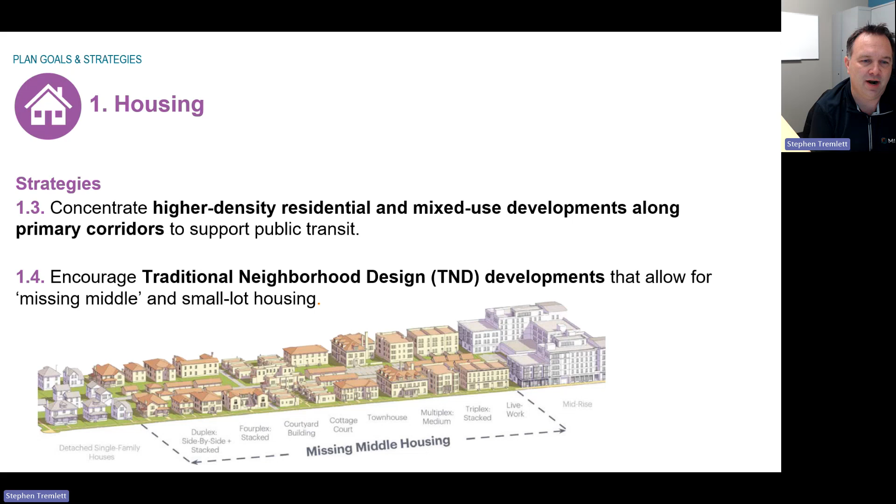1.4, encourage traditional neighborhood design developments that allow for missing middle and small lot housing. This is a graphic that's been shared throughout planning with the idea that older neighborhoods in the past did have this variability of missing middle that doesn't exist now, and there's interest to see that variety of housing types and options moving forward.

Mobility goal is to implement safe, convenient, and attractive streets that are accessible for all ages, abilities, and modes of transportation. The strategy for that goal is to develop a convenient and connected multimodal transportation system that links the neighborhood to the city and to the county at large.

And 2, require proposed streets to connect to existing streets and intersections where practical. That graphic we're seeing on this page demonstrates that. That white line divides 2 developments with the connection of streets and connecting out to the main arterial.

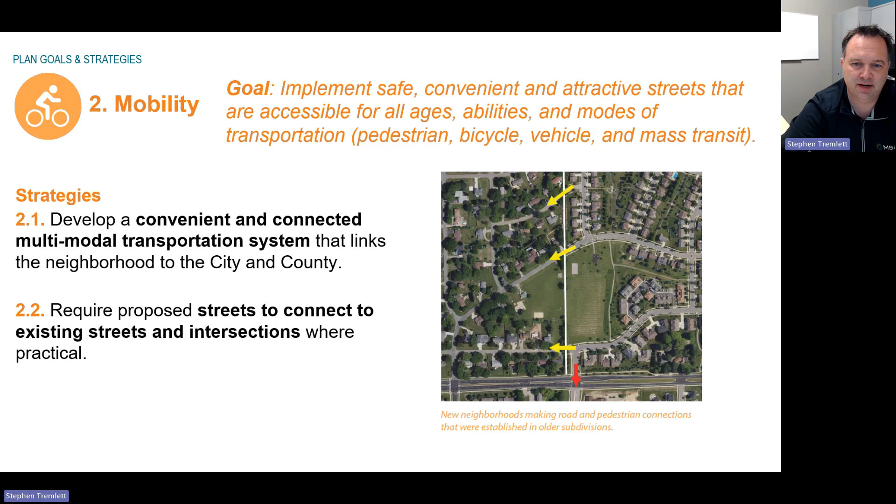Third strategy under mobility is to discourage cul-de-sacs and dead-end streets in favor of connected streets that provide flexibility. And fourth, design complete streets and utilize traffic calming and safety measures where appropriate to create a better street environment for pedestrians and cyclists.

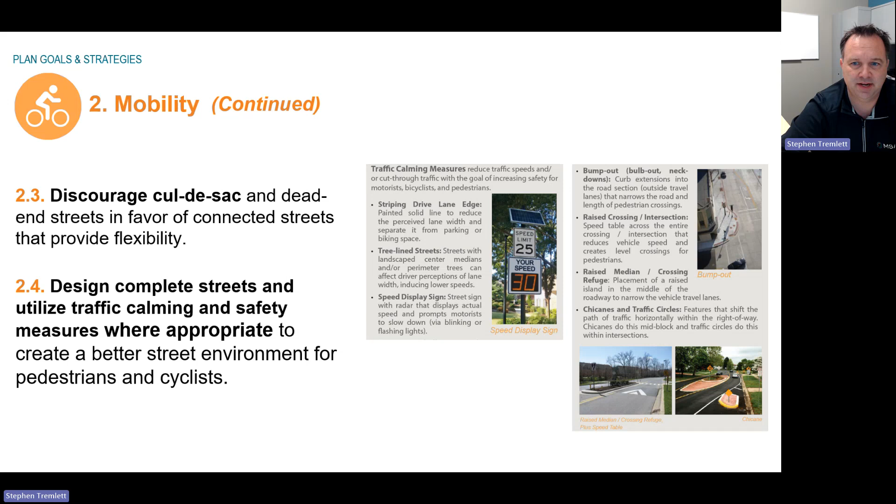Economy goal: locate employment options near residential areas, supporting the local and regional economy and providing job opportunities. First strategy under this goal is to attract businesses that meet local and regional needs, provide job opportunities, mix of uses, and expand property tax base.

Strategy 3.2: promote commercial and business park areas compatible with the scale of surrounding developments or screened to the extent practical. And strategy 3: incorporate safe and convenient pedestrian, bicycle, and motor vehicle connections within and through commercial mixed use and business park developments. The example here is actually in Fitchburg, where there is a combination of a business park to the south with a residential neighborhood to the north.

The orange arrow shows the road connection that is not directly to the arterial through the business park, but is providing access from the neighborhood into the business park without having to go out to the main road and back through. The yellow arrow shows there is a pedestrian connection straight through from the neighborhood to the business park.

Also notable is that in the business park the building types are smaller, closer to the neighborhood, while there are larger buildings, such as in the southeast corner here, showing a much larger building further away that's further buffered from the neighborhood.

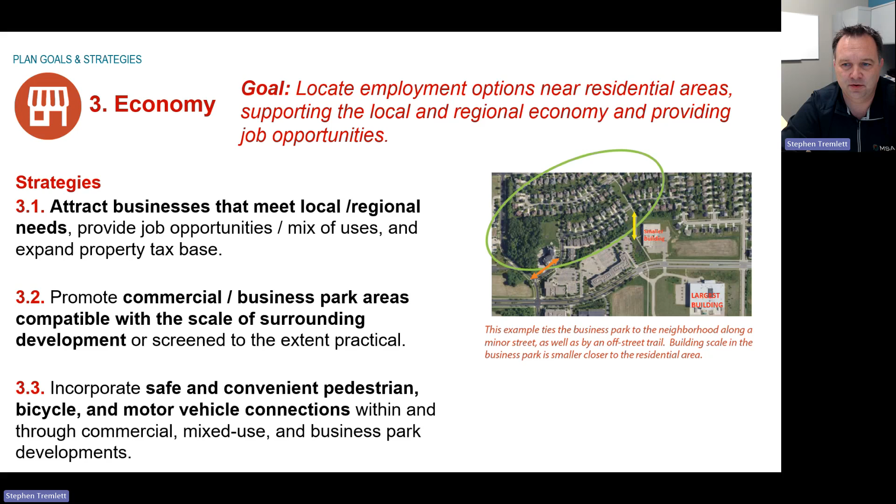Quality of life goal is to maintain streetscapes and open spaces that are accessible to all residents for recreation and enhance neighborhood character. Strategies under this goal include designing residential areas around community gathering spaces, parks, schools, churches, and community gardens.

Strategy 4.2: plan parks that vary in size and facilities to fulfill ranging recreational interests, consistent with the Fitchburg Parks and Open Space Plan. And 4.3: make intentional multimodal connections between local and regional parks and open spaces.

Example here of a neighborhood in Sun Prairie where there is a blend of different park spaces. The green circle shows your traditional park, yellow shows more of an urbanized boulevard, and the red is a town center around mixed use.

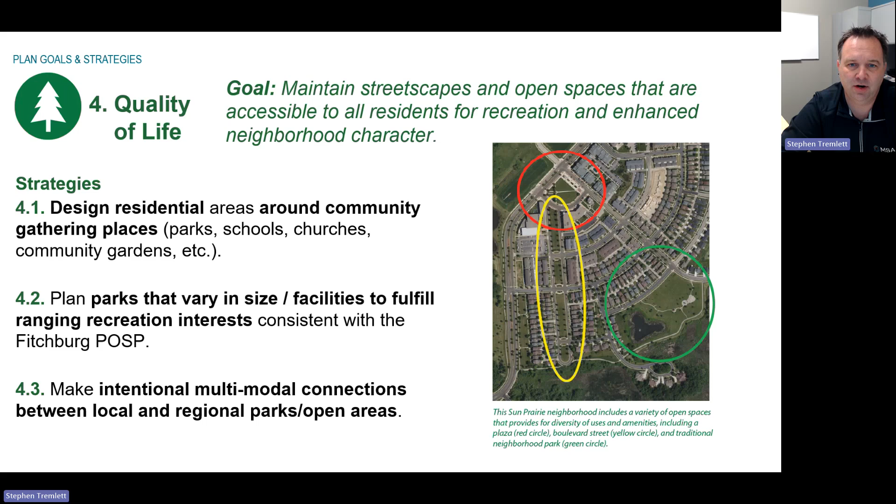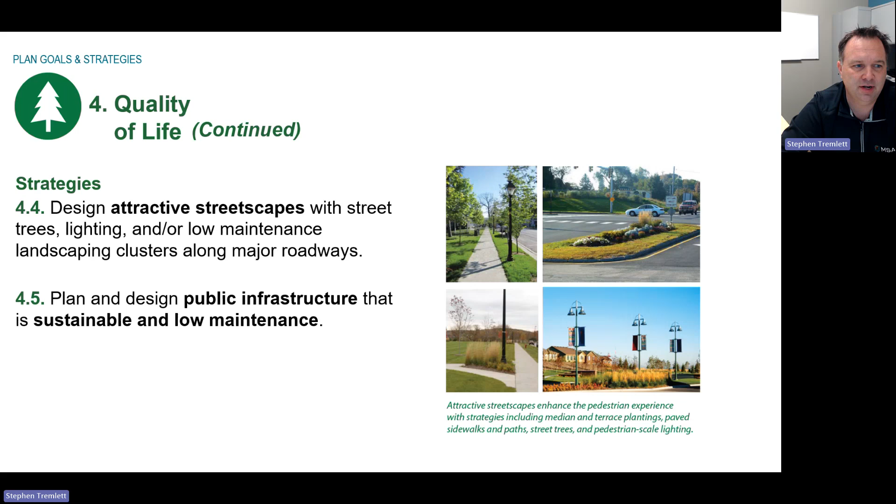Strategy 4 under quality of life: design attractive streetscapes with street trees, lighting, and/or low maintenance landscaping clusters along the major roadways. And strategy 5: plan and design public infrastructure that is sustainable and low maintenance.

The fifth goal, sustainability: create an economically and environmentally sustainable development pattern, protecting existing natural features. Strategy 1: protect and restore the environment by integrating natural features into open spaces for recreation, public gathering, or flood protection and stormwater management. Strategy 5.2: preserve existing tree canopy to include woodlands that will not be quarried.

Notable: this neighborhood is primarily currently being quarried on the northern portion, so there are some wooded portions that may not remain after that operation is done. But if there are portions still existing after the quarry operation, the intent is to preserve those woodlands.

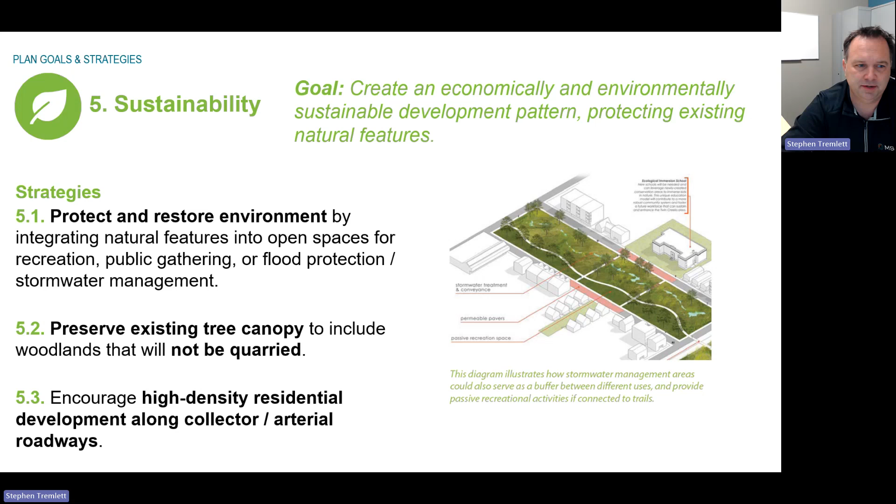Strategy 5.3: encourage higher density residential developments along collector and arterial roadways. Strategy 4: explore options to recycle quarry byproducts through site development. Strategy 5.5: encourage energy efficient buildings consistent with the city's energy targets. Strategy 5.6: consider opportunities for alternative energy use within the neighborhood design.

Now I'll go through the progression of the land use concept that is the baseline meeting those strategies and overall goals. First, I want to note what this concept plan is and what it's not.

What it is: a long-term vision and what's allowable if applying for development approvals. It supports identifying character and design parameters and identifying infrastructure needs to best serve that neighborhood and adjacent lands in a fiscally responsible way. But it's not suggesting property owners shall redevelop or sell for development.

It's not restricting landowners from using their property as they're currently using it. It does not determine exact placement of roadways beyond connecting point A to point B of collector roads, meaning on the edge of the land being developed, they need to connect where we're presenting a major east-west or north-south connection. How that might meander within the development may differ in the ultimate plan.

And lastly, it's not determining lots or specific building type placement.

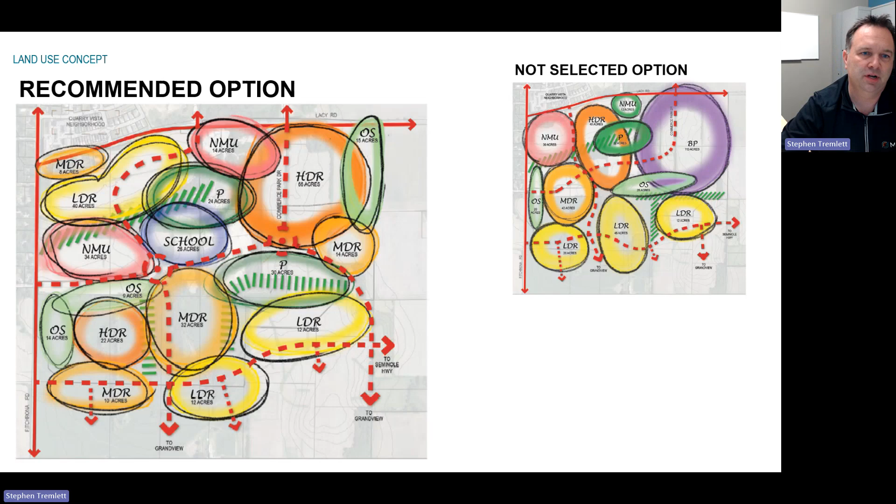So some changes from the bubble diagrams to the initial detailed concept here. Just go through each one. First, the bubble diagrams describe what the uses are intended in the northwest corner of this quarter area, but that is outside the study area. So moving forward, you see that plan, a low density residential neighborhood outside the study area that's already in the urban service area, with intentions for that neighborhood to the north as the road network shows.

But changes from the bubble diagram include: one, identification of several collector roads connecting the endpoints, with suggestions that two roads run north-south through the western half of this neighborhood, connecting south and up to the neighborhood to the north. Two, connection of collector A with the opportunity for that to connect out to Seminole to the east.

Number three, the inclusion of business parks — that's the purple you see here. The school is still in existence in this diagram, but the neighborhood mixed use moves to the east side of Commerce Park, with business park making up the western portion of Commerce Park Drive. It's hatched, meaning it's an option, flexible land use. Potentially that use between business park and the high density residential shown here is largely impacted by whether there is a remaining high wall between the two quarry owners.

As quarry operations are ending, reclamation plans are put forward where you bring back the land to agricultural use, and you have to tie in at the property line to whatever elevation exists today. So if both quarries end up reclaiming the land, they would have to come to a point at that line — so there's kind of a high wall that would show up right here between them. That does not provide for likely use of business park along Commerce Park Drive. That's why you see that blend of use between Commerce Park and the purple business park. If those lands were worked out to be flattened between the two landowners, there's a greater opportunity for business park there.

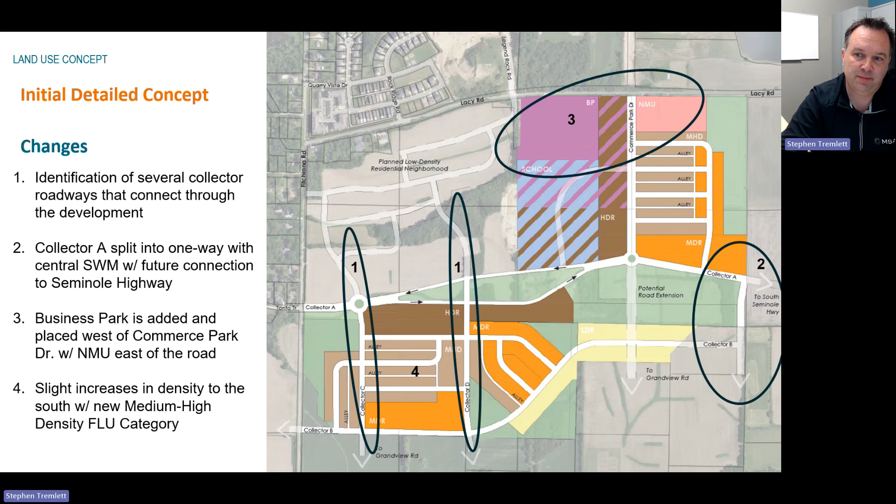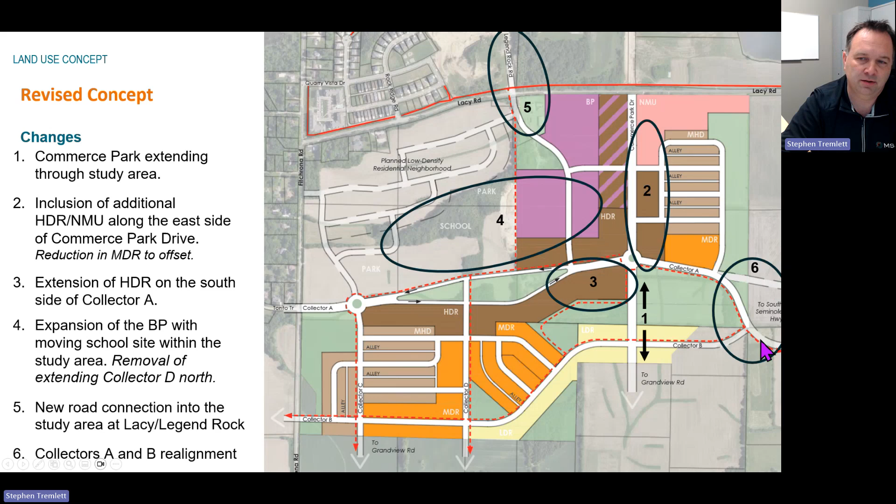Number 6 is a revision of how Collector A could potentially develop over time. Currently, the original design had it going through what is now a solar farm, which is now an end use for those lands to the east. So there's plausibility that the road to Seminole Highway could still be where number 6 is labeled, but alternatively there's an option to take Collector A further south and around that solar farm to reach Seminole Highway.

Even further, a final concept was drafted. This was after we had preliminary engineering. So everything up to this point has been evaluating land use primarily, but at this final stage we've done preliminary engineering to understand utility needs and stormwater management needs, and through that we've determined that the land dedicated for stormwater could be reduced.

So you see number 1 in the northeast, an expansion of the neighborhood mixed use all the way to the edge of the neighborhood. Number 2, inclusion of an NMU, neighborhood mixed use, in the southwest portion as you come in from Fitchrona Road. Number 3, there was discussion that those lands are wooded and would not likely be quarried, so preservation of that area was one of the strategies we talked about earlier. Number 4, showing this trail network that could go through here, which didn't exist in the previous concept.

Number 5 is incorporating a trail, the red dashed lines, all the way from Lacy through this neighborhood and hopefully all the way to Grandview. Number 6, in some of this additional trail network, it was felt that it was not necessary to include it on the section between Collector A to Collector D along Collector B. So that portion has been removed, with the replacement of the areas shown in 4 and noted in 5.

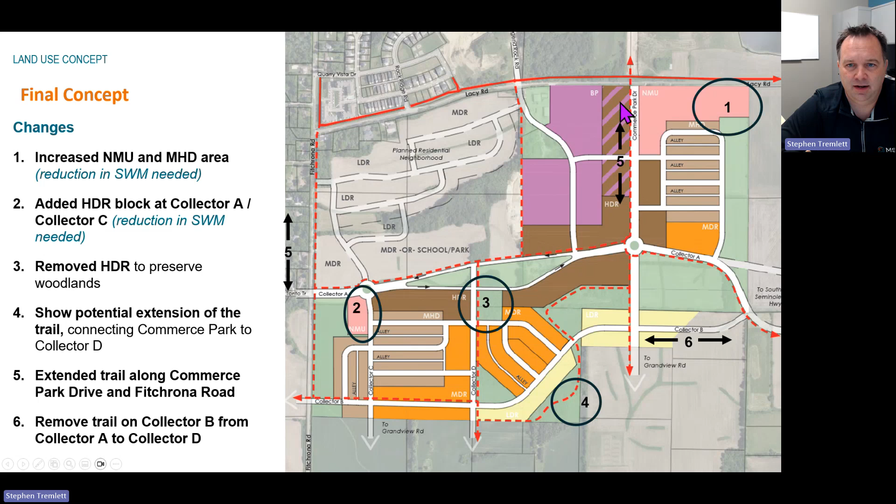I want to touch on the idea that this area for the school is outside of the neighborhood, but through discussions with the steering committee, it was important throughout this process to consider a school in these lands. We did discuss with the district about their interest here. They are looking for the parameters listed on this slide for an ideal location, and there's interest potentially from the school to locate here given the amount of units we're talking about in a walkable neighborhood. If it were worked out with the landowner, it could likely be in the portion that's circled, with a park in addition, potentially, which could reduce the school's land needs if there's a shareable park.

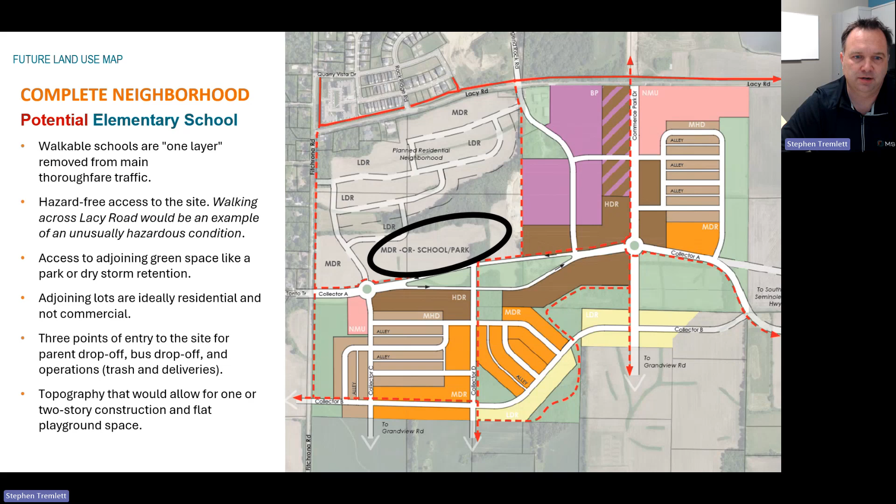So what I described earlier was the concept. Again, that gets into parameters of design, kind of blending mixes of uses desired, but ultimately the policy document is the future land use map. When the city created their comp plan, they identified this area as a growth area and suggested there would be some additional planning, which is this process, to determine what those future land use categories should be for these lands.

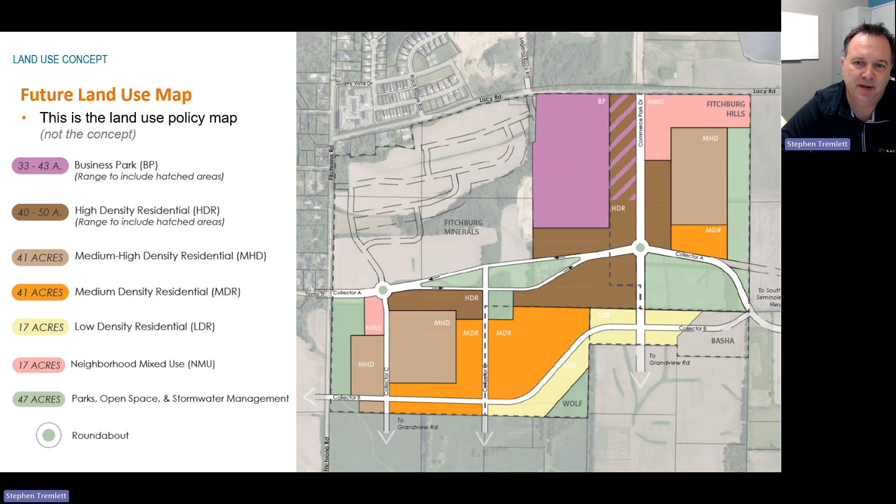So that is why we're going through this process, identifying the future land use for future proposals from landowners and developers. So that concept I showed, this is more of a version that is the policy document. You don't see all the road networks that were presented in that concept. You see the major collector roads, but it's not presenting exactly how any interior local roads are being designed. So you see those categories, and there would likely be parks, and additional parks within these areas, dependent on requirements per code.

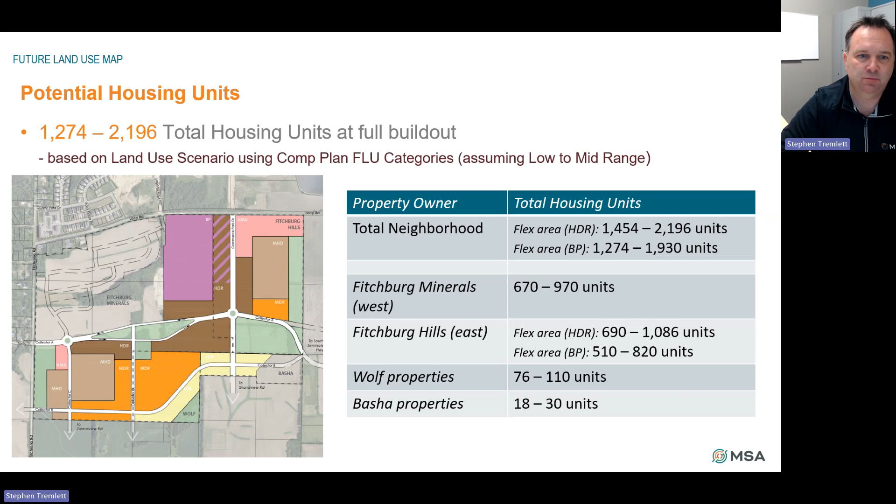So in total, we're talking potentially between around 1,300 more units, up to 2,200 more units, depending on how densely the area grows. Notably, we divided this out a bit by landowners, because obviously these are going to be built individually by landowners unless additional lands are purchased. But just wanted to note that we're talking about potentially up to 5,000 more people could be in this area, depending on household size.

So I'm going to go a little bit about the preliminary engineering. We looked at traffic here, and this is evaluating per full build out by 2045. We base it on certain home types and commercial types, so we did have to make some decisions here to get a projection of the number of trips that would be in and out of this neighborhood.

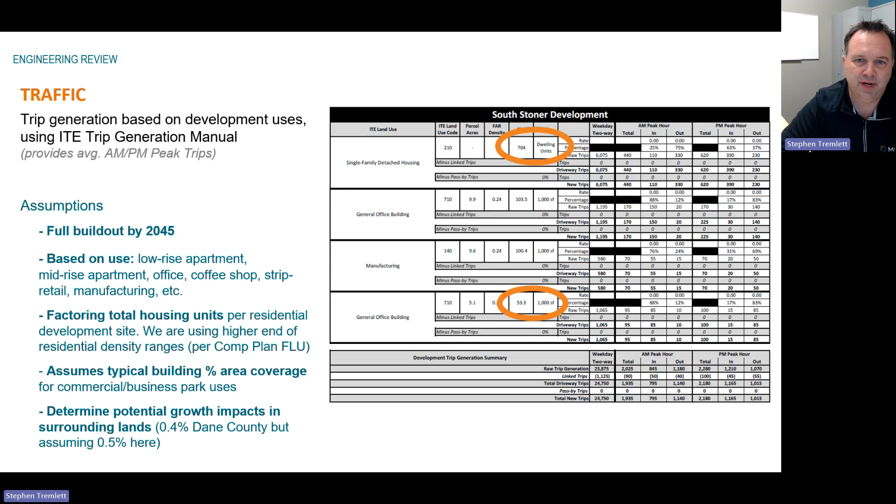It assumes a factor based on the median. Every future land use category has a range of density, so like low density is 2 to 5 units per acre. We took the median of that and used that to determine the number of housing units. We also included additional growth potential of 0.5 for areas developing outside this area—typically in Dane County you'd use 0.4, so we were more conservative. We also included a 20% increase on total trips. So basically, we took a median but added a lot of contingencies and conservatism to that number to equate to a certain number of trips through the neighborhood.

What does this tell us? We're showing two options here because we had that flexible area—the number 6 on the graphic could go to high density residential or could be a business park. Option A is all residential, Option B includes a business park there. In total, we're looking at AM total trips between 1935 to 2005, and in the evening, 2180 to 2255.

We have a breakout of assumptions for where traffic would flow through the neighborhood and out: 10% to the west, 15% to the north, 30% to the east on Lacy, and 15% east on Collector A.

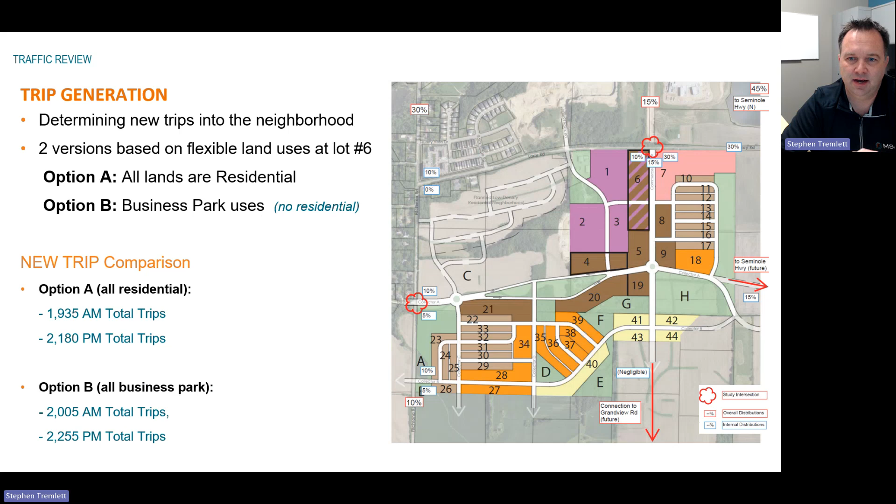With that trip information, we're also able to look at specific intersections to see if there's a warrant for controls—meaning is there a signal, is there a roundabout, or is it free flow. The evaluation of Commerce Park and Lacy, in the box you see in the north, suggests that at full build out, there would be a need for a controlled intersection.

Staff has interest in seeing that be a roundabout. There's a roundabout going in at Fitchburg and Lacy to the west, and there's already roundabouts to the east towards Seminole Highway. Generally, controls work best as roundabout after roundabout after roundabout, because that helps with efficient flow.

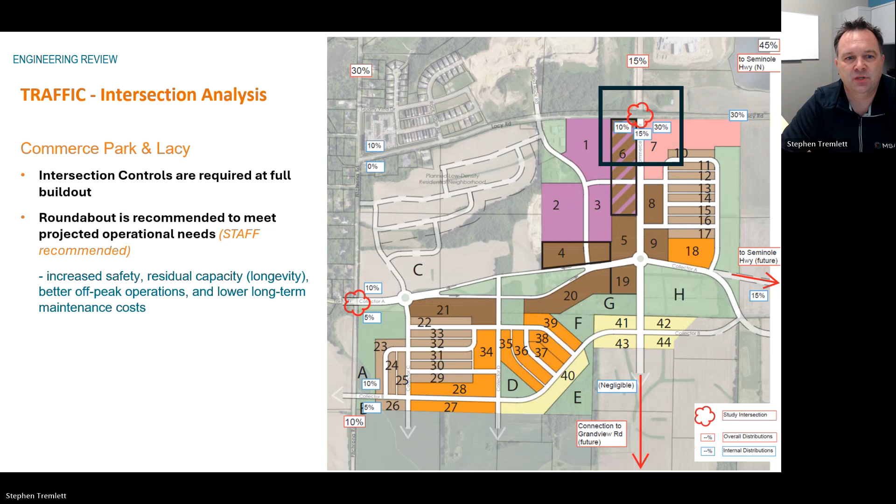Then we also looked at Collector A and Fitchrona to the west. Based on full build out, it's not recommended for any controlled intersection—you would likely have a stop sign on Collector A before getting onto Fitchrona. There will be some longer queues potentially for left turns onto Fitchrona. Ideally you're at level of service D or better; it does project that at full build out it may be an F. However, going to a controlled intersection can create more accidents from people being impatient trying to get into traffic on Fitchrona.

So it's not suggested that any additional controlled intersection is necessary here, but as it develops it can be reevaluated. I did want to note that we intended for Collector B to the south to have the opportunity to continue west past Fitchrona. There is a potential proposed development in the Town of Verona on the west side of that road, so further modifications may take place considering where that Collector B actually lines up with Fitchrona if that development goes forward.

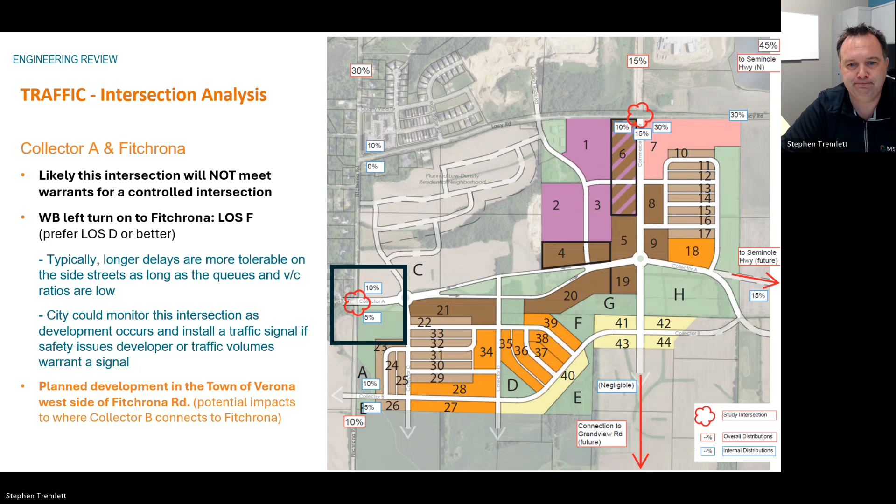Talking about utilities, starting with stormwater management—I noted earlier that the sizing of the basins were reduced. This is what you see where there's a dividing line between a western development, circled here, and the eastern development. So there's a split line again where that one wall would potentially be between the two landowners, and it all would drain east of that line. You see two wet basins and a dry infiltration basin in the center that will serve that area.

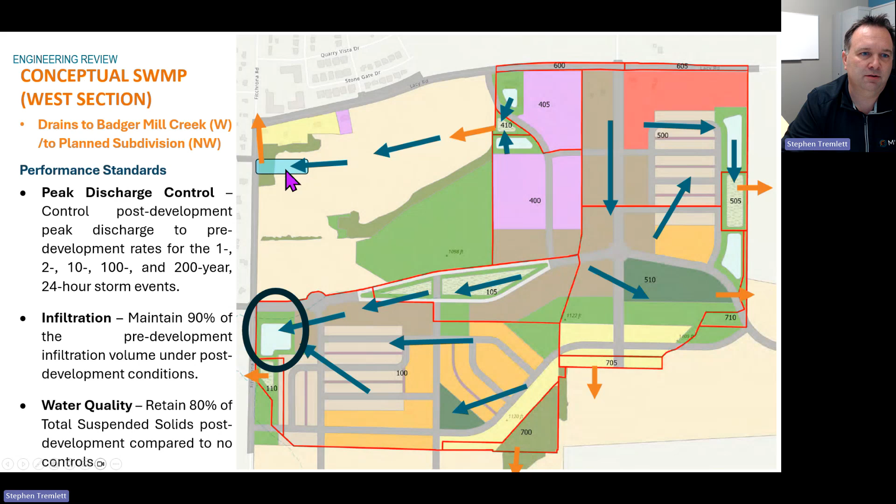The western half, we are presenting that there would be a split roadway with dry basin infiltration in the center of it, similar to Sherrill Parkway—a similar design in Fitchburg. All water here in the lower portion within the neighborhood would funnel to the west along the edge there. We are presenting how the water would flow to the north, outside the neighborhood. There is a small portion in the business park that would funnel through that system and run out to Fitchrona and head north.

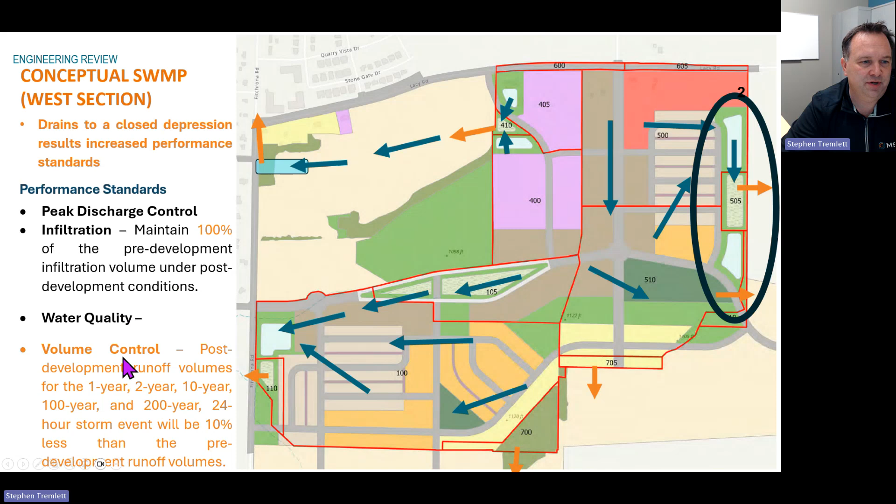Did want to make another note that on the eastern portion, circled here, that drains to a closed depression. That closed depression requires increased standards, noted here in orange, taking up to 100% pre-development infiltration volume, and notable increases in volume control necessary in that sizing.

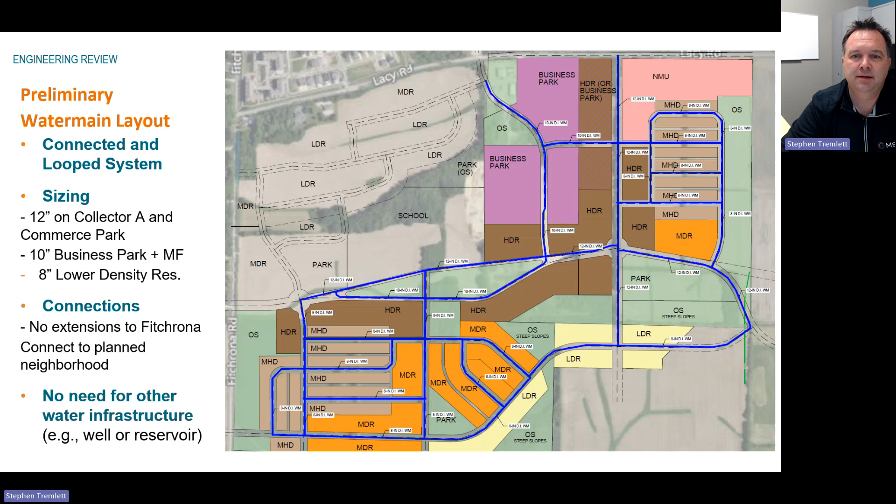Water main, you'll see generally everything is looped, meaning you want developments to have multiple connections in case one breaks or needs to be shut down, to still serve the neighborhood. So that is intended here. Again, a lot of the street network here is conceptual. The local road design will be by each development. This is just giving a representation that it can be served in this area without additional water infrastructure beyond the piping that is sized based on the development along it.

Sanitary design, notably, practice has been to use 100 gallons per day per person for evaluating capacity. The fixtures people put in today are a lot better, low flow, and we can comfortably drop that to 80 gallons per day. There's actually been a study in Wisconsin that showed 53 is the average. So we're still being conservative at 80. I'm just making that note because that still impacts what capacity is for serving into this neighborhood.

We did look at options for how to serve all of the neighborhood, wanting to not exceed 30 feet in depth for that utility, because as you go down, it gets more expensive. This is split, just like stormwater, eastern half and western half. The blue outline shows how the eastern will be served from Lacy Road. The connection shown in that green line is what we're looking at for sanitary design.

But notably, there's potentially capacity issues to what we project for how to serve at full build out for this, because the city does want to reserve some of that Lacy Road connection for additional development along Lacy. So there would need to be considerations of either density staying a little bit lower than we are projecting, or there needs to be another connection point. Maybe it's collector A here that connects out to Fitchrona. Maybe there's another service that comes and works out with Edgewood College.

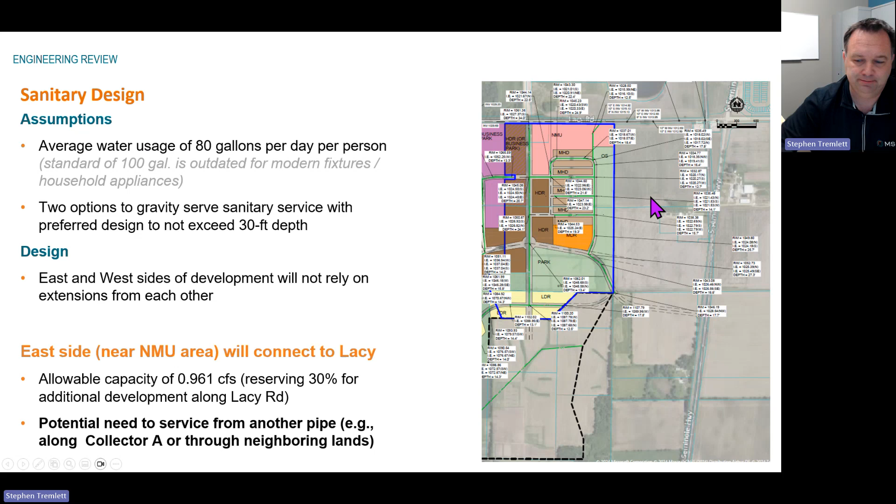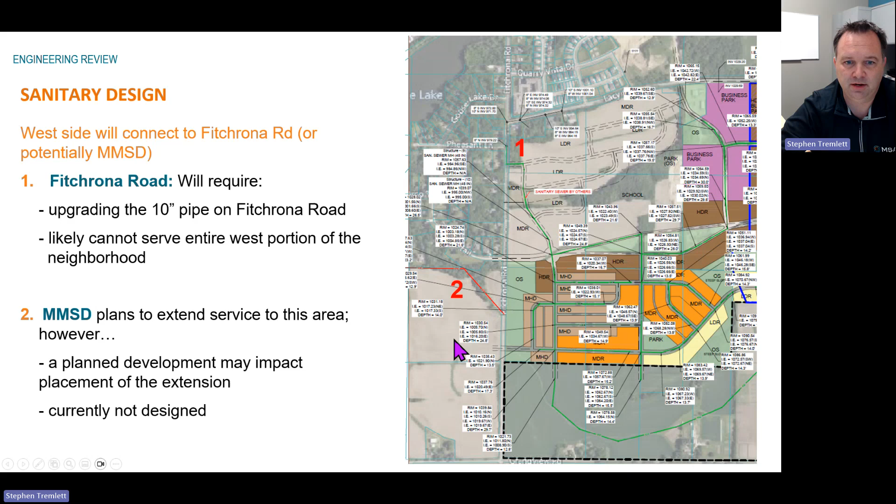So it's likely that you would need both 1 and 2 here, but notably on number 2, there's currently not a design for that. That's going to be starting soon, but that planned development may impact exactly how that could connect into the neighborhood.